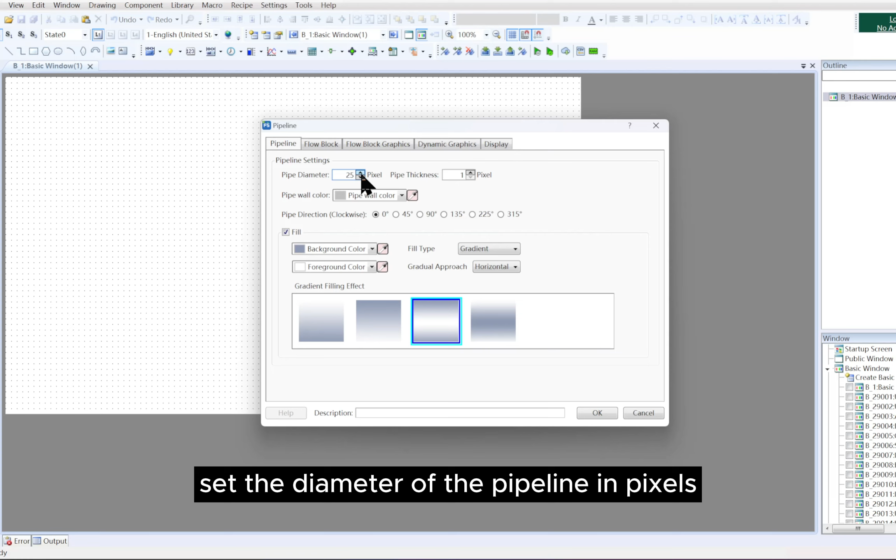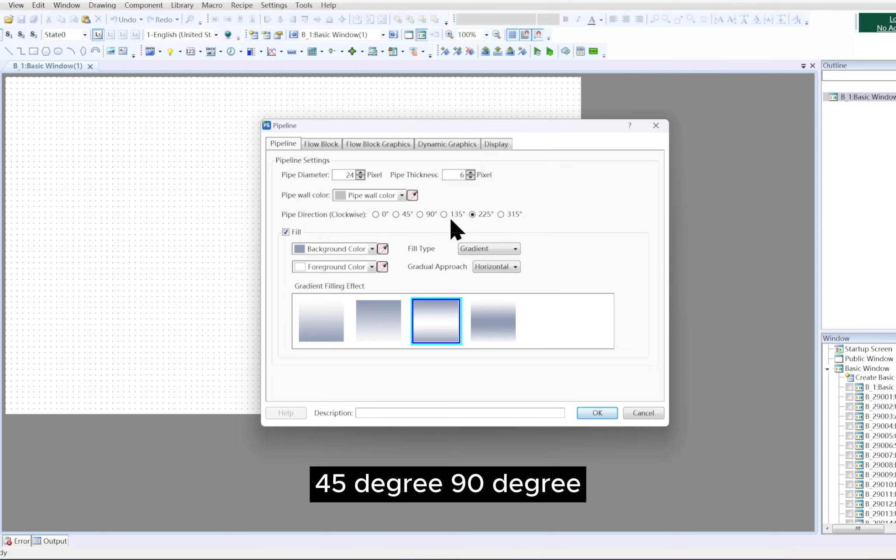Pipe thickness. Set the thickness of the pipeline in pixels. The default value is 1. It is not recommended to change this value. Pipe direction. Set the direction of pipe inclination, clockwise. Options include 0 degree, 45 degree, 90 degree, 135 degree, 225 degree, and 315 degree.

Background color. Set the background color of the pipeline. Fill type. Choose the fill type for the pipeline. Options include solid color, filled with a solid color, which can be customized. Pattern. Use a pattern to fill. You can select a pattern. Gradient. Use a gradient color to fill. You can set the background color, foreground color, and gradient direction.

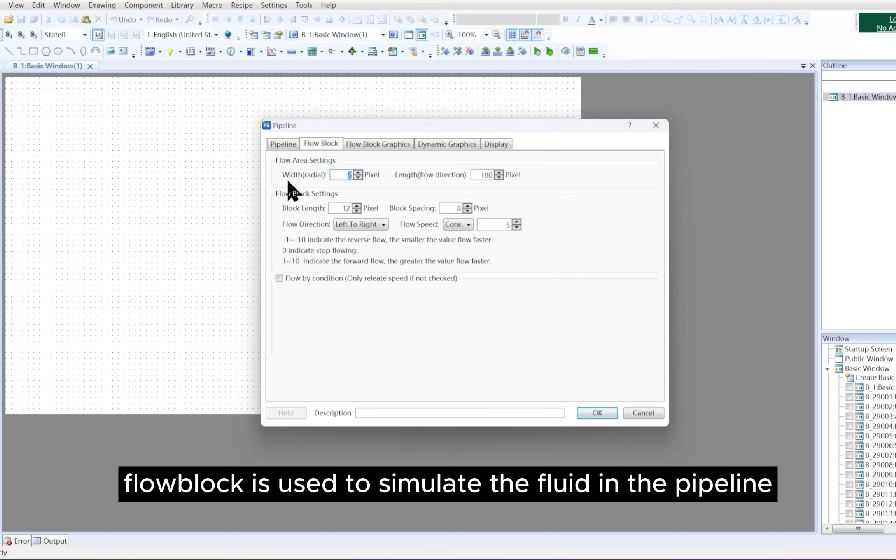Then let's set the flow block properties. Flow block is used to simulate the fluid in the pipeline. Configure the following parameters: width, radial. Set the width in the direction of the pipe diameter. This should not exceed the pipe diameter. Length, flow direction. Set the length in the flow direction. Block length. Set the length of the flow block. Block spacing. Set the spacing between flow blocks.

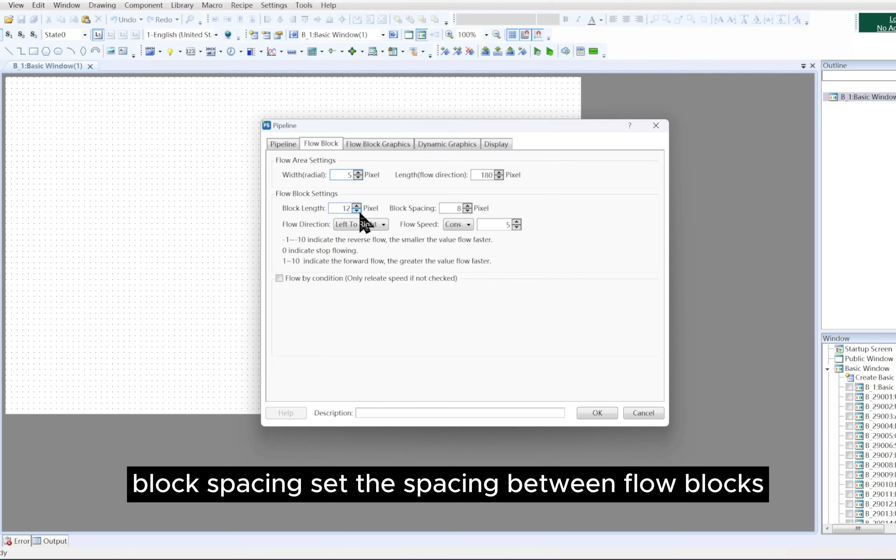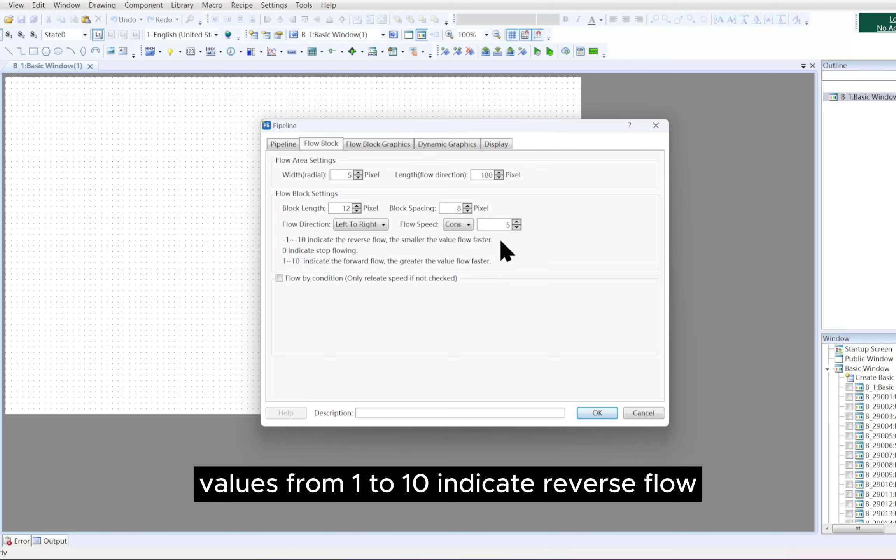Flow direction. Set the flow direction. Options include left to right and right to left. Flow speed. Set the flow speed of the flowing block. This can be a constant or a variable. The value range is -10 to 10. Values from -1 to -10 indicate reverse flow, where smaller values represent faster flow velocity. A value of 0 represents no flow, i.e., the flow is stopped. Values from 1 to 10 indicate forward flow, where larger values represent higher flow velocities.

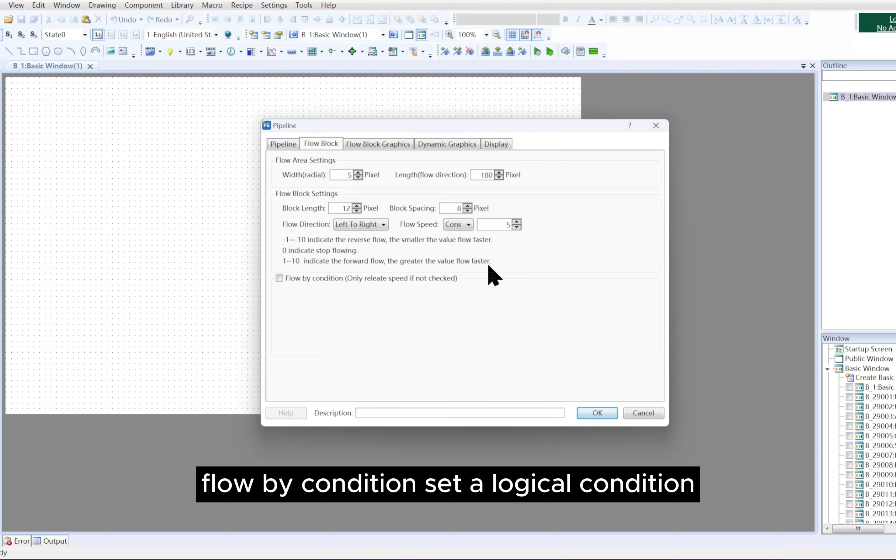Flow by condition. Set a logical condition, such as the value of LB0 being on, to control the start and stop of the flow. If you do not select this parameter, the flow will be controlled by the flow velocity itself. Afterwards, set the flow block graphics properties. Check Use Graphics, then select the graphic. Configure the following parameters. Import. Click Import to import the system graphic library and custom graphic library. For detailed information about the graphics library, please refer to the graphics library.

Create graphic. Click Create graphic to add a new one. This includes setting the graphic name, size, and number of states. You can modify the width and height of the image on an existing graphic. Edit graphics. Click Edit graphics to customize a graphic. You can edit graphics of different states. Shadow effect. Check Shadow effect to set the shadow color and offset.

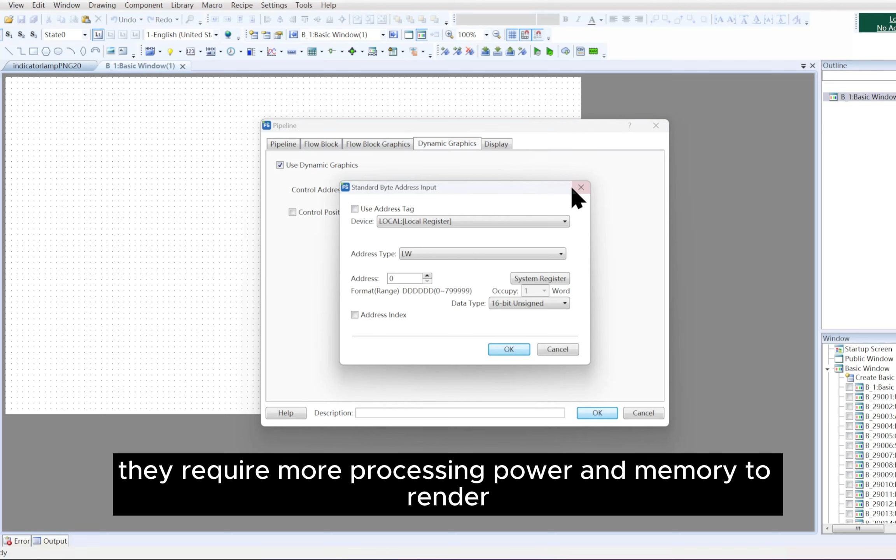Set the dynamic graphics properties. It is not recommended to use dynamic graphics. They require more processing power and memory to render, which can slow down the system, especially if there are many dynamic elements or if the system hardware is not powerful enough. However, there might be specific cases where dynamic graphics are useful, such as when showing a process change over time. It's always important to consider the specific needs and capabilities of your system when deciding whether to use dynamic graphics.

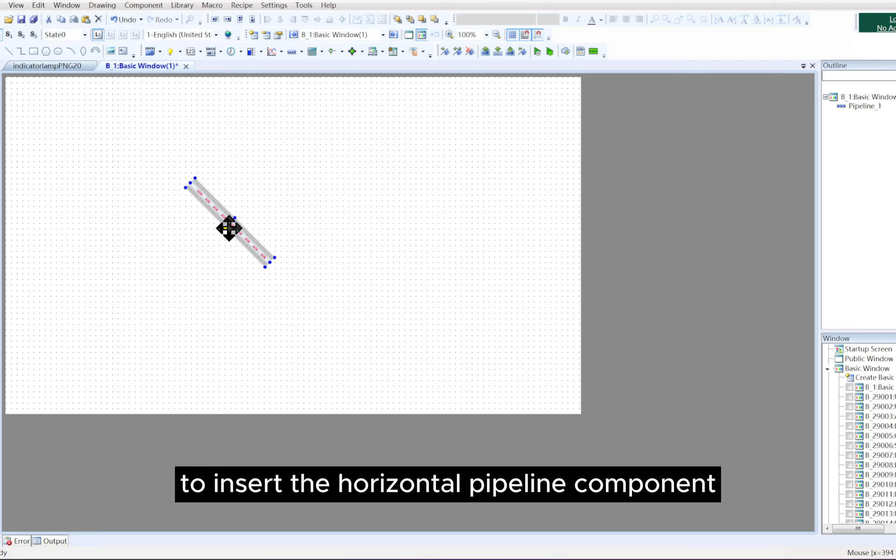Next, set the display properties. Click OK. Step 6. Insert the horizontal pipeline component. Click anywhere in the window to insert the horizontal pipeline component. Please follow these steps carefully to ensure a successful creation of the horizontal pipeline component.